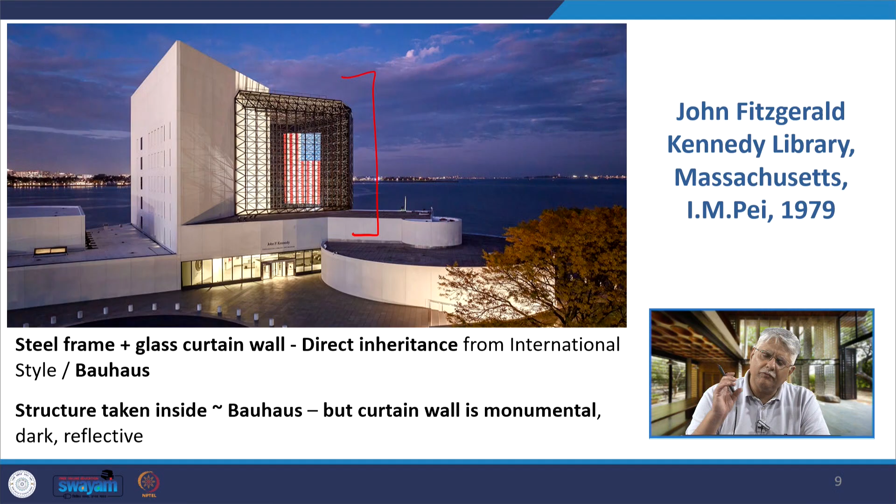So when we come to a late modern John Fitzgerald Kennedy Library by I.M. Pei in 1979, we find it also has a steel frame and a glass curtain wall. It is a direct inheritor of the international style Bauhaus. The structure has been taken inside just as done in Bauhaus, but the curtain wall here becomes monumental on a tremendously massive scale, and it is made of dark, reflective glass.

Again, there are pure geometries in this project, a glass cube pavilion and a stark contrast with the white concrete walls, and thus we say it has got a monumental abstraction. The building is not the orthogonal plain geometry that we found in Bauhaus, it is a much more abstract composition and a monumental composition. There is no outward ornamentation or historic reference, as in the modernist buildings in Bauhaus.

This library continues the modernist tradition of internalizing the structure, but it amplifies and monumentalizes the forms, turns them into statements rather than functional solutions. In Bauhaus, the internal structural system was a functional solution to the structural problem. Here it becomes more of a statement, more symbolic. And Charles Jencks also places it in late modernism, an era where modernist features were exaggerated.

Then we come to the Javits Center in New York by I.M. Pei in 1986. Please keep in mind that one of the intents that I have in showing you these projects is so that you can get a large vocabulary of buildings and architects who have done these projects, and also the wide geographical spread in which these buildings have been made.

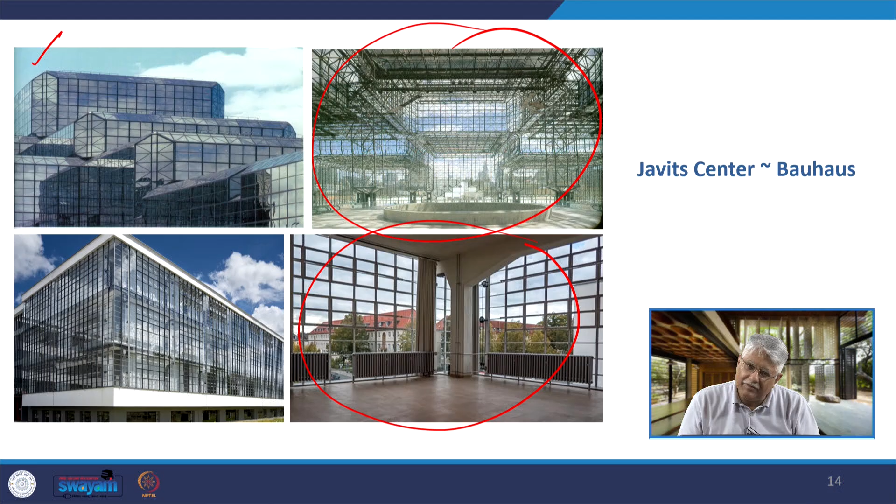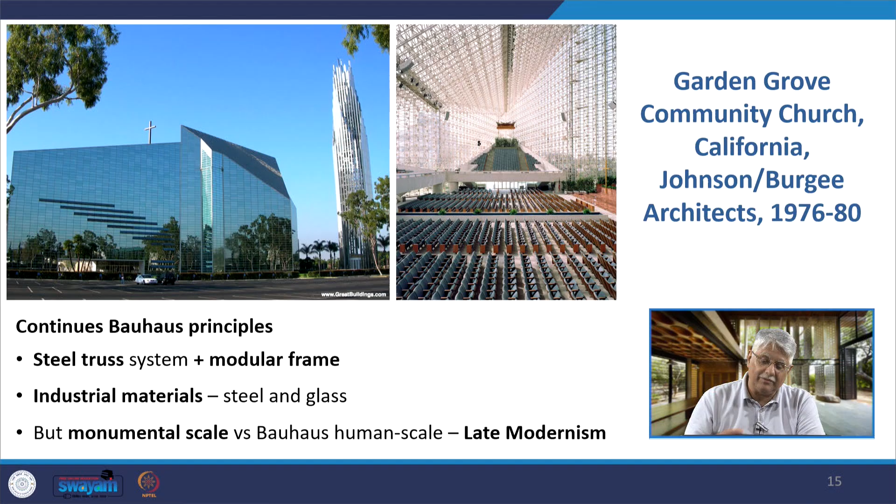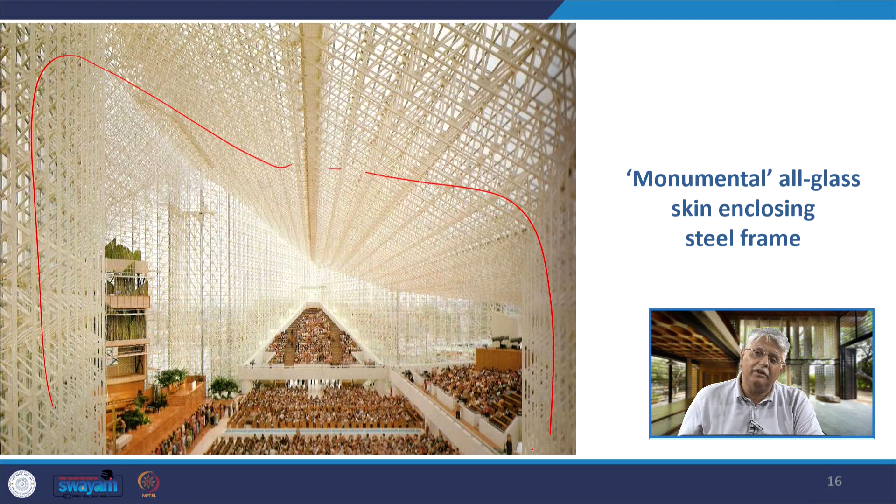Then we come to the Garden Grove Community Church in California by Philip Johnson and Burgee Architects, 1976 to 80. It continues the Bauhaus principle, again the steel truss system, modular frame, industrial materials, but a monumental scale versus the Bauhaus human scale. This is again an example of late modernism, and look at the scale. This is how amazing the scale of the interior is. This entire glass and steel structure mounted over the church is monumental, all glass skin enclosing the steel frame.

And then the second part, we come to the subset of the ones we have seen. Now the second part for today, there are at least three that we saw last time. We have seen the impact through Bauhaus. Now we come to a point called slick tech. Slick tech is an architectural expression that was mentioned by Charles Jencks, and it emphasizes technological refinement, smooth, well polished surfaces and a highly engineered aesthetic.

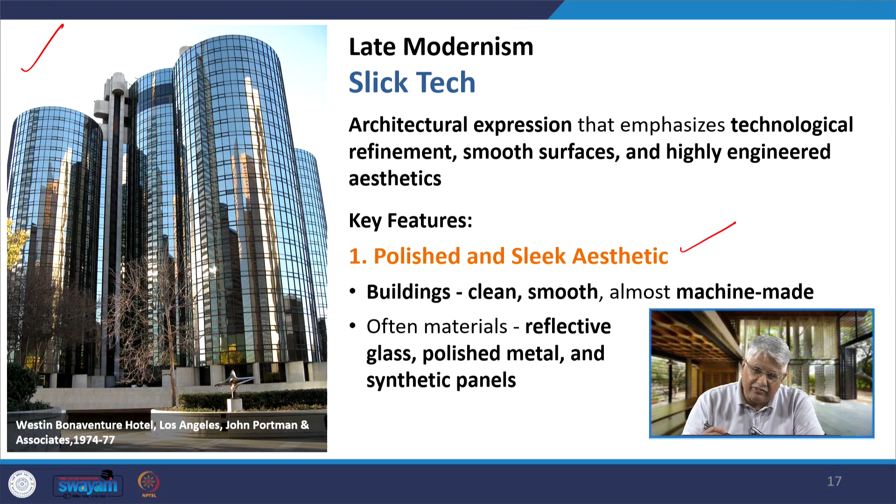So classic example, the Westin Bonaventure Hotel in Los Angeles by John Portman and Associates. Here you find this very sleek glass facade, highly polished smooth surface. So the key features are polished and sleek aesthetic. The buildings are clean, smooth, almost machine made, and often the materials used are reflective glass, polished metal and synthetic panels. It also has a corporate expression, generally used for corporate buildings, in this case big hotel buildings with some multi-purpose parts. Architecture serves large institutions, especially corporations and financial centers, and the projects convey a sense of power, order and control.

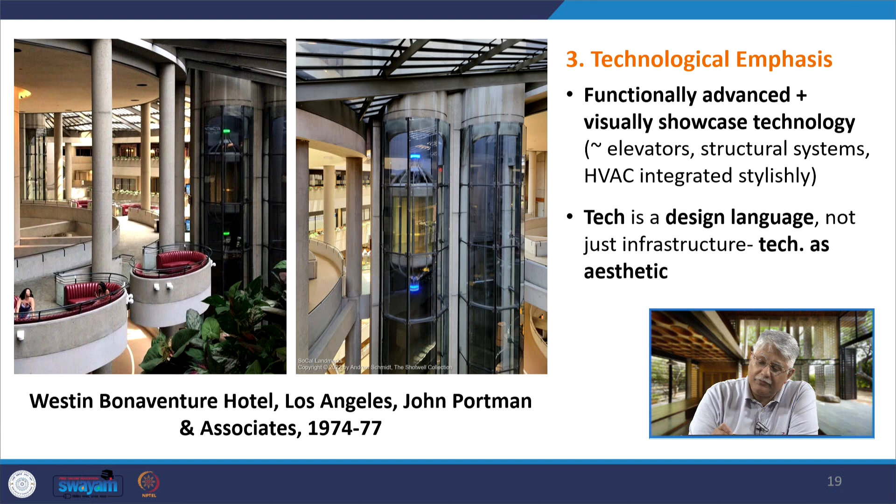Third aspect to it is technological emphasis. There is an emphasis on technology and trying to make technology a part of the design. Now this is a very important point, because later on in high tech architecture this point will literally explode, when all the equipment and machines in the building would be on display on the outside of the building. Here this technological emphasis is functionally advanced and it visually showcases technology. For example, you see these elevators running through the atrium of the hotel and they are clearly visible.

I am reminded of Antonio Sant'Elia's definition also, that elevators will not be hidden, they will run like serpents on the walls of the buildings, and it is happening. So these elevators, structural systems, the HVAC, they are all integrated stylishly into the building and they become a part of the design scheme. Tech is a design language, tech is used as an aesthetic of the building, and so the tech features are not hidden, but they are made a part of the overall design language of the building.

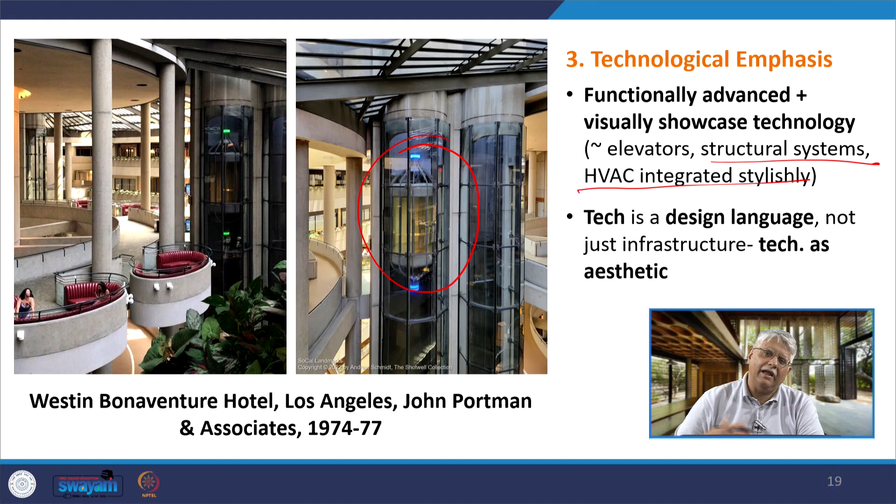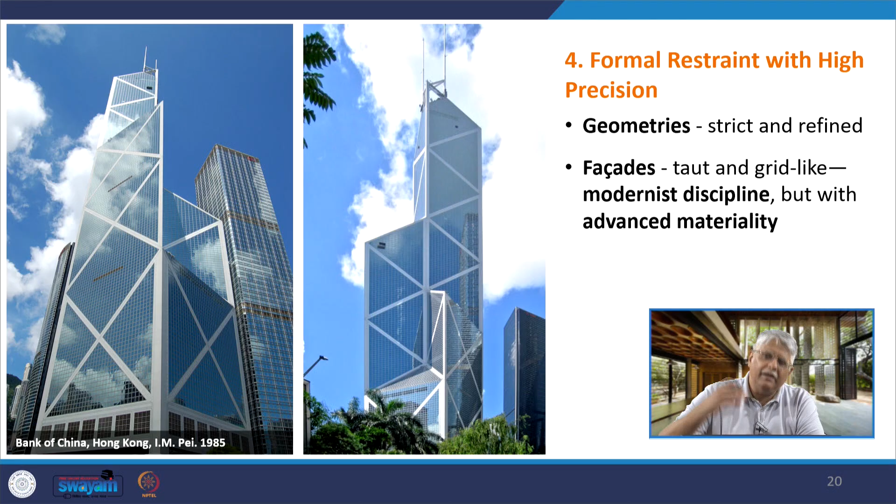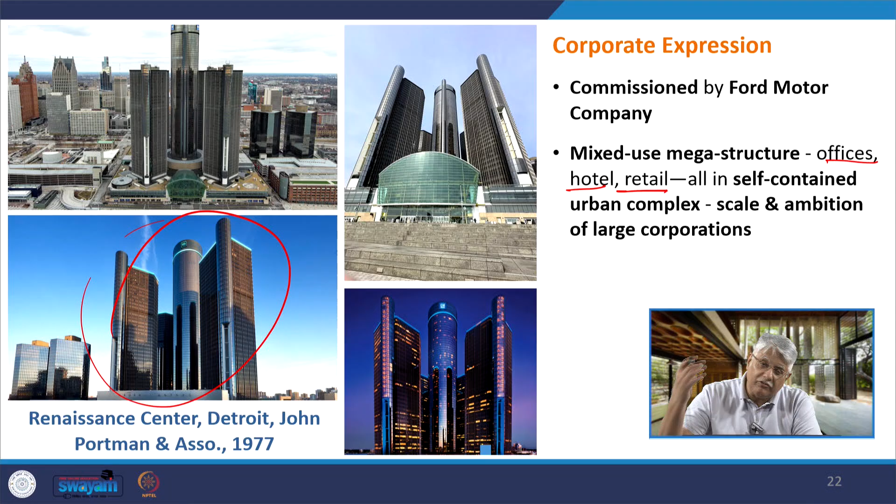It is a mixed use mega structure which has got offices, hotel and retail areas. All of it is self-contained in this urban complex and it has the scale and ambition of a large corporation. It is also a self-sufficient mega structure. That means the complex has got office towers, luxury hotel, retail spaces, restaurants, parking decks all within it.

And very interestingly, you see in the hotel that the cars are on display to represent the Detroit car industry and to show modern technology to make the building feel like a sleek high-tech showroom. So that intent is also being followed here.

Then we come to one of the buildings that is considered to be a textbook example of slick tech in late modernism, and that is the Willis, Faber and Dumas building by Norman Foster in 1970-75 in England. It has got technological elegance with precision, that is a curved glass curtain wall which is completely encasing or going around an irregular site around the building with seamless precision.

The glasses are put together without any transoms and mullions, and so we have modern materials and very high tech detailing. Today having such glass is very common for us to see, for example in airports, but in 1975 it was a unique thing to do to bring such sleekness in the glass facade. So the building reflects the surrounding in the daytime and the building reveals itself, the inside of it, in the night time.

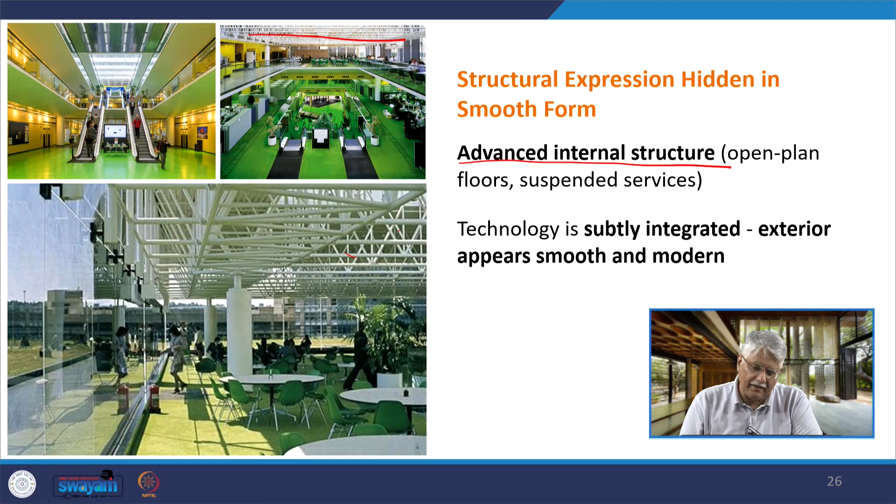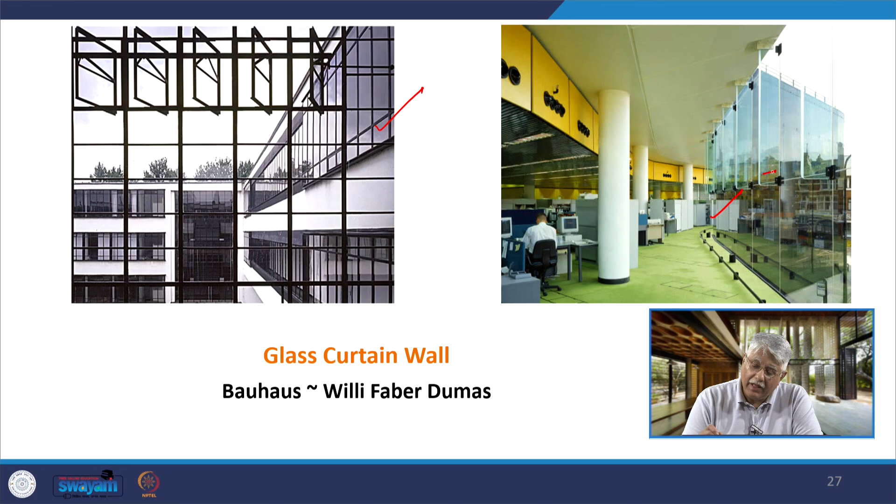If you look at the glass curtain wall and you want to compare with modernism, then the Bauhaus glass curtain wall was this one, having smaller glass panels with transoms and mullions, and this is that of the Willis, Faber and Dumas without any intervening members, continuous glass, only the fins are here, and the continuous glass stretches along the wall.

Then we come to the Hyatt Regency O'Hare Hotel in Chicago, again by John Portman Associates, and repeatedly we are seeing that John Portman are designing hotels for the Hyatt Regency chain. So again, as in the other hotels they have designed, this hotel also has a massive atrium.

The common design concepts and features of the hotels designed by them are evident in these Hyatt Regency hotels, because there is a standardized design language probably desired by the client, that is the Hyatt Regency chain, and for them John Portman Associates designed the atriums of these hotels, one more unique or stand out than the other.

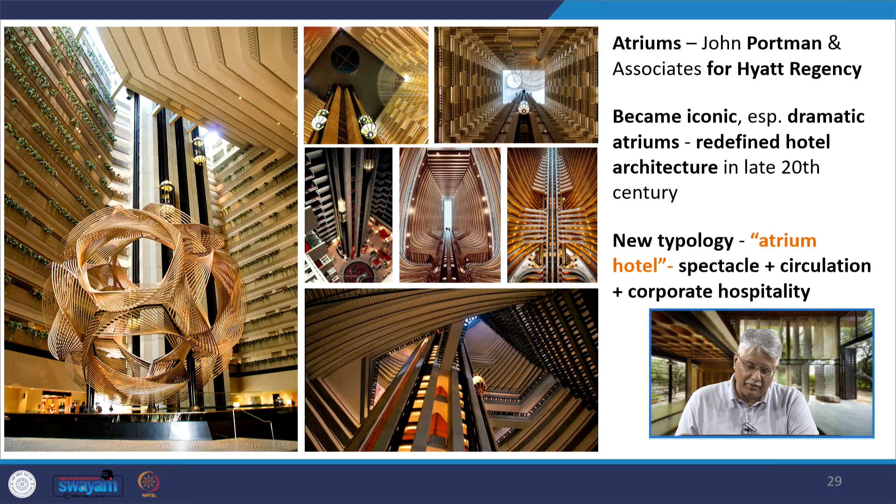And one interesting thing about the atrium is, as you can see, the scale is massive. So when you step into this kind of space, you lose the sense of the human scale. But what architects do when they design these atriums is that they provide these spaces at the floor level which are on a human scale, so that the whole monumental space gets divided into smaller spaces and thus becomes more suitable for human function or human use.

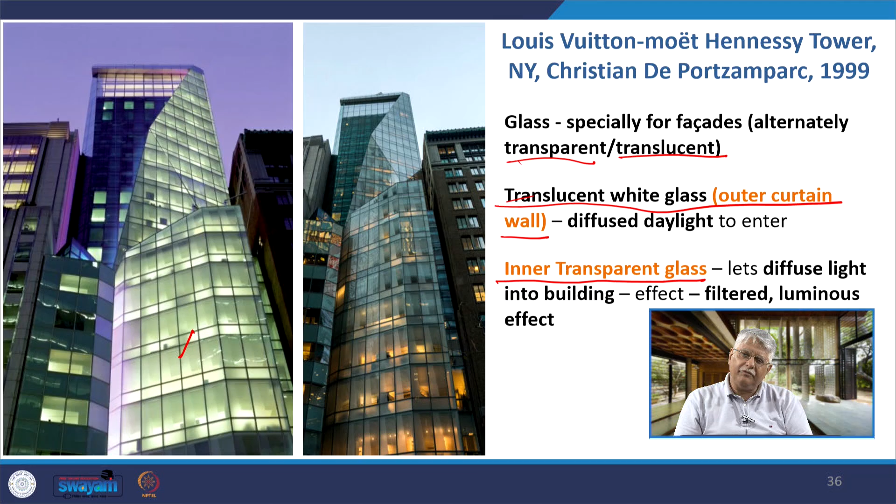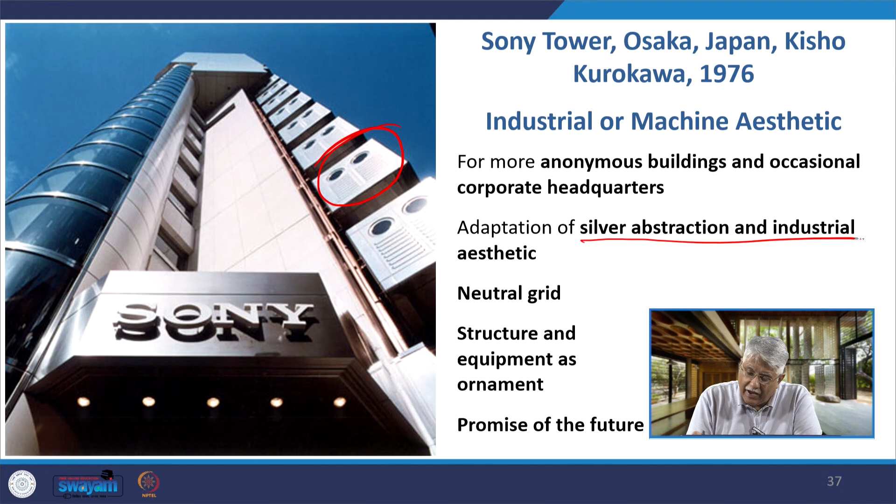Now industrial machine aesthetic was for more anonymous buildings and occasional corporate headquarters, adopting a silver abstraction or industrial aesthetic. I will tell you what it means. It means basically when you look at all the appliances around you today, you find that so many of them are silver in color. It could be your laptop, your phone, your tablet, your refrigerator, your washing machine. It is generally either silver, or it can have grey tone, or it can have white. So generally the appliances we use follow this kind of color palette.

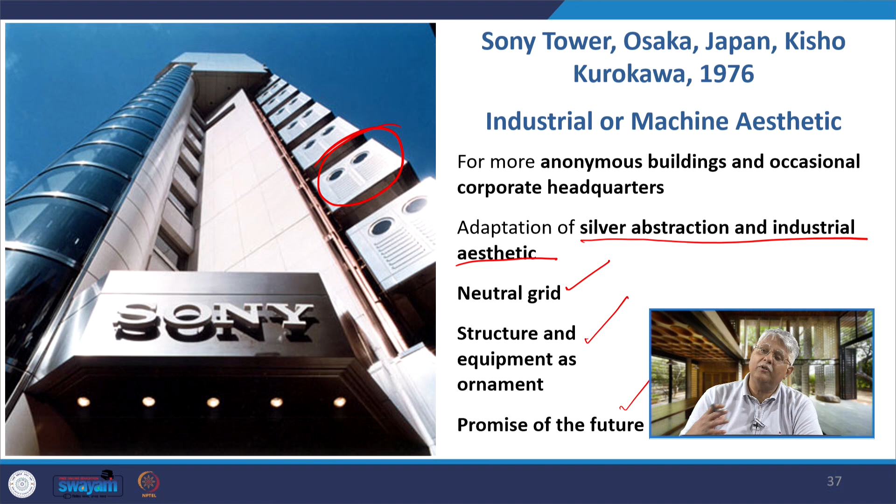Then again, this industrial aesthetic also has buildings which have a neutral grid. The structure and equipment become the ornament of the building, and the buildings reflect a promise of the future. When you look at them, you are reminded of what is to come in the future. So in these buildings there is use of metals in the facade, and most metals are either natural grey or silver finish. The word silver abstraction refers to the silver finish we find in the metals, and they play a large role in determining this industrial or machine style. The neutrality of silver or grey aesthetic is essential for teamwork design.

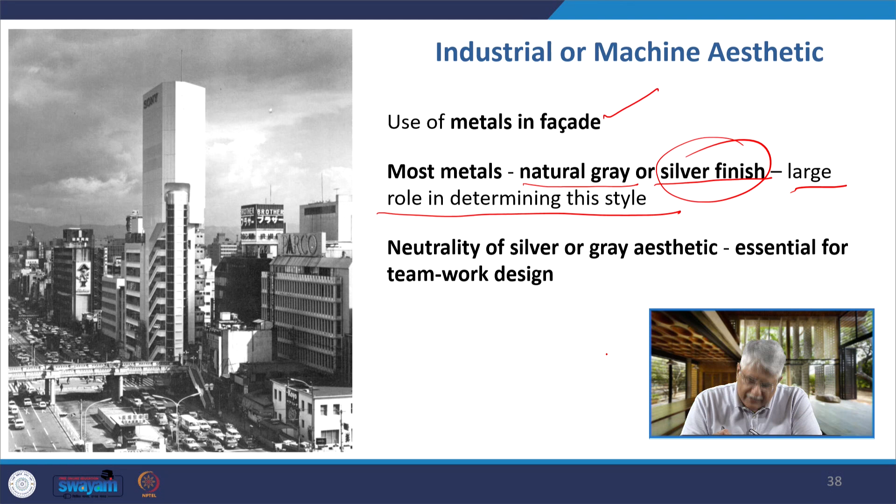I will explain that. Their concept about designing these buildings is that many designers are going to simultaneously work on smaller components of the building, and the final form is not aesthetically predetermined. There is only one thing, the neutrality of silver being a welcome background. This basically means all the small teams come to a common consensus that we will be working with a silver palette, or a neutral grey palette, or a steel finished palette. So they all work separately on different components of the building, the form not being predetermined, and when they assemble these parts together, the built form comes up. It seems unified because the palette each team has used is the same, so they all harmonize together.

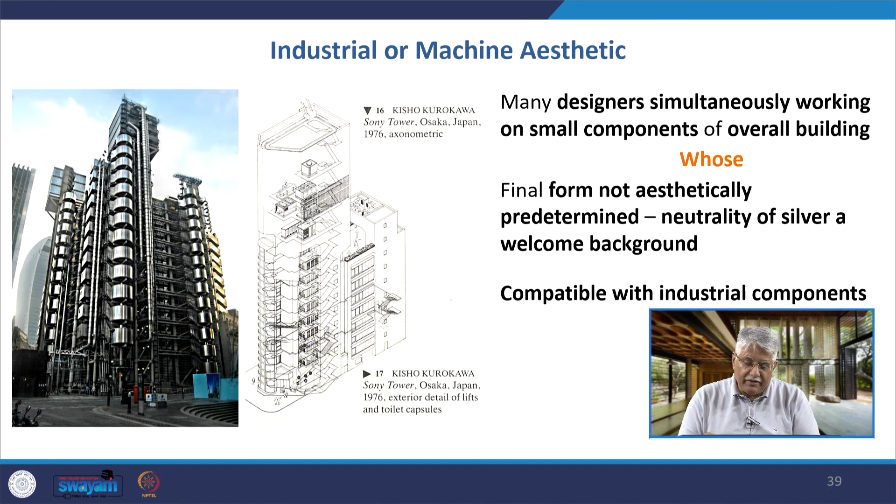Now when I spell it out like this, it seems very simple, but it is not so simple. There are many more complicated design steps required to put together a building like this. Also, these buildings are compatible with industrial components. By this time, industrial components or appliances that we use in our homes had started having tremendously good aesthetic quality.

When I refer to you a company's product, you are attracted to that product because of its tremendous aesthetic quality. When I say an Apple laptop, when I say a particular brand phone, when I say a particular brand television, the aesthetic quality of the industrial product plays a very important role.

Now when they said that they are designing buildings with the machine or industrial aesthetic, they are trying to make it compatible with office equipment in corporate buildings, or if it's houses, then the household appliances. But because we are focusing on corporate buildings, we will restrict ourselves to making it compatible to office equipment.

The second part is the building is considered to be a machine, a concept suitable for the industrial age. And here is where the second aspect we learn from Bauhaus comes in front of us. The first one was when I talked to you about the JFK library, that the Bauhaus curtain wall skin with the structure taken inside was the principle used in many of those buildings, albeit on a monumental scale.

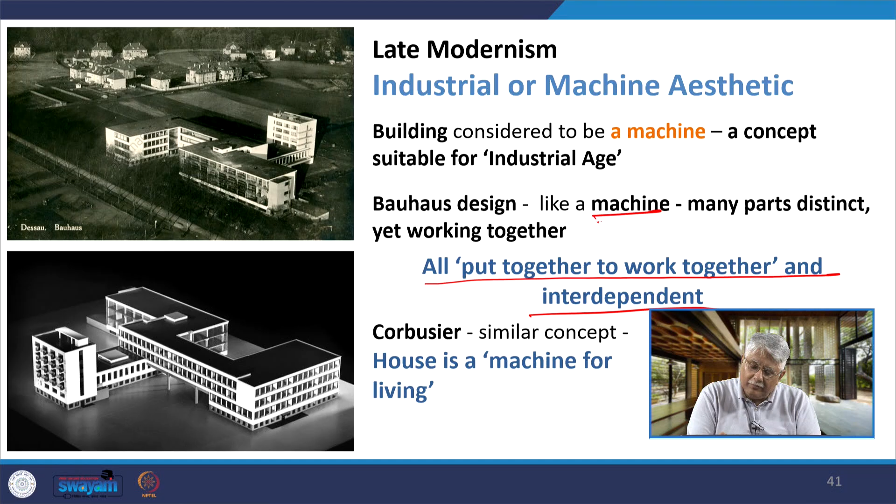So they started looking at the building again as a machine, or having a machine aesthetic became important for them. Something that had already been talked about by a modernist or an international style architect like Le Corbusier. Hence, even in the international style, the buildings had become industrial.

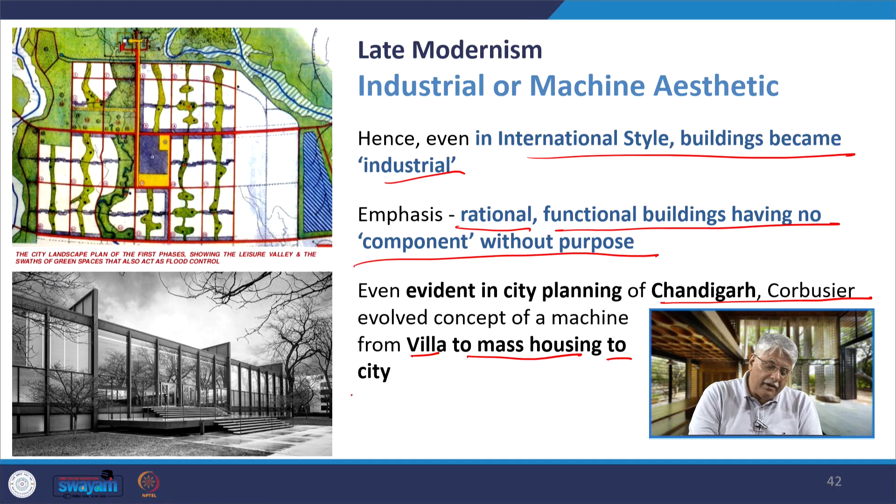The emphasis was on rational, functional buildings having no component without purpose, even evident in the city planning of Chandigarh by Corbusier, who evolved his concept of a machine from a villa to a mass housing project like Unité d'Habitation, ultimately to the design or planning of a city like Chandigarh.

Now, this industrial or machine aesthetic, as you see here in one of the most iconic buildings which define industrial machine aesthetic, is Centre Pompidou. Nothing is hidden, everything is expressed. All the ducting, all the AC pipelines, all the electrical lines, all of them are on the outside of the building and they are color coded with primary colors. We will talk about that in detail later.

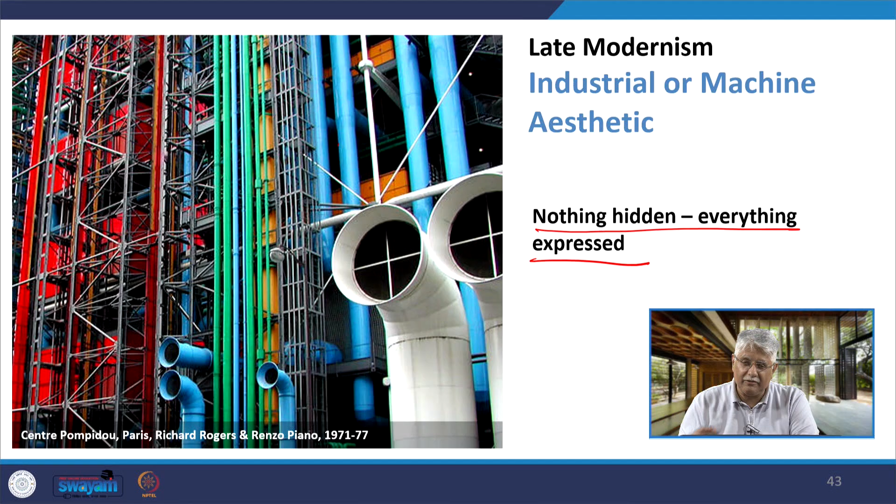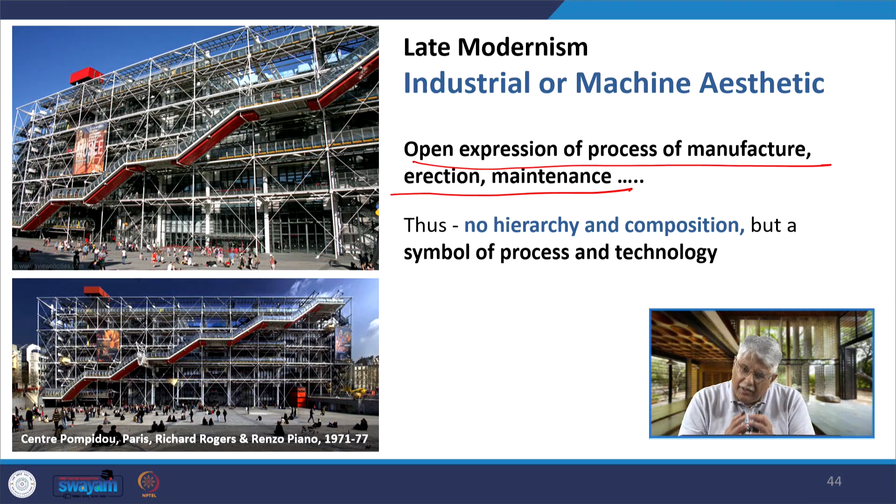It is an open expression of the process of manufacture, erection and maintenance. There is no hierarchy and composition, but it is a symbol of process and technology. That is how the building has been very clearly seen, how the building has been put together and how the building works.

High-tech architecture is not a subset of late modernism, though I am talking about it here because under late modernism we have machine aesthetic, and machine aesthetic is leading us towards high-tech architecture. But high-tech architecture is not a subset of late modernism, it is a parallel and partly overlapping movement that emerged from late modernism in the 1970s and continues even till today.

It evolved independently into a distinct architectural language in the 1980s and beyond, though it started from the industrial and machine aesthetic concept under late modernism. Richard Rogers said, a building should appear to be assembled from a kit of parts. So, the Lloyd's of London literally appears as if it has been assembled from a kit of parts.

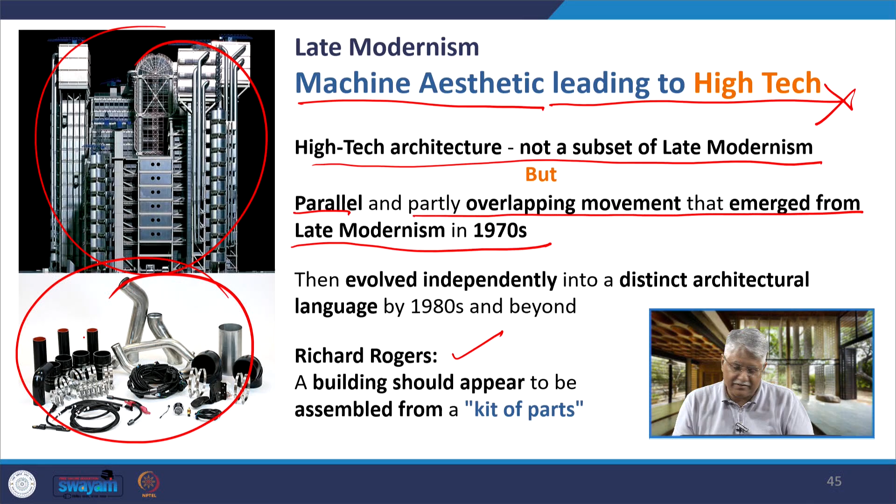Now, just to give you an idea of the chronological sequence of these movements, 1920s to 1950s we have modernism, which has got form follows function, with architects like Le Corbusier, Mies van der Rohe and buildings like Villa Savoye and Bauhaus. 1960s to 1980s we have late modernism.

It has got abstract geometry and advanced structure, industrial aesthetic, white aesthetic, it has got sculptural and geometric expression. All that is here in these buildings, and we have architects like Richard Meier, Kenzo Tange and I.M. Pei, and we have buildings like the Glass Pyramid.

1960s to 1990s we have postmodernism, which we will talk about later, which has historical reference. It has got ornamentation, with architects like Robert Venturi and Michael Graves, with buildings like the Portland Building and the AT&T Building. In the 1970s till today, like I said, till today, high-tech continues.

It is exposed services, structure as aesthetic, and metallic materials, with architects like Renzo Piano, Richard Rogers, and Norman Foster, and buildings like Lloyd's of London and the Centre Pompidou.

Now, in high tech, we have Lloyd's of London, but it goes without saying that this building also has machine aesthetic. When I say high tech, I am not neglecting the fact that it displays a sense of a machine or industrial aesthetic. Better still, the word is factory aesthetic. This has got services and circulation which are obvious and accessible.

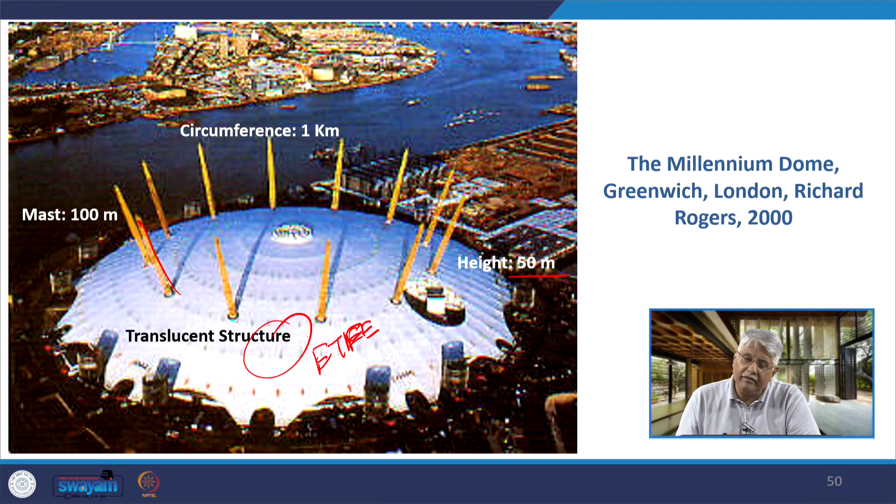So the Millennium Dome has got a translucent structure. It is made of ETFE, or you can simply call it Teflon. The height of the dome is 50 meters, its circumference is 1 kilometer, and the masts themselves are 100 meters high. It has got an industrial aesthetic, but it falls primarily in the category of high-tech architecture.

Now, late modernism carried on to the advanced phase of the industrial age, where architects looked into varying building typologies for their answers. Many were quite unorthodox vis-a-vis the building, but they were fundamentally correct. They were looking at building typologies which were not the buildings they wanted to build, but they found that these typologies gave them the right answers. For example, warehouses and factories gave them the answer for the design of community halls and exhibition halls, like the Sainsbury Centre for Visual Arts, which is a factory aesthetic.

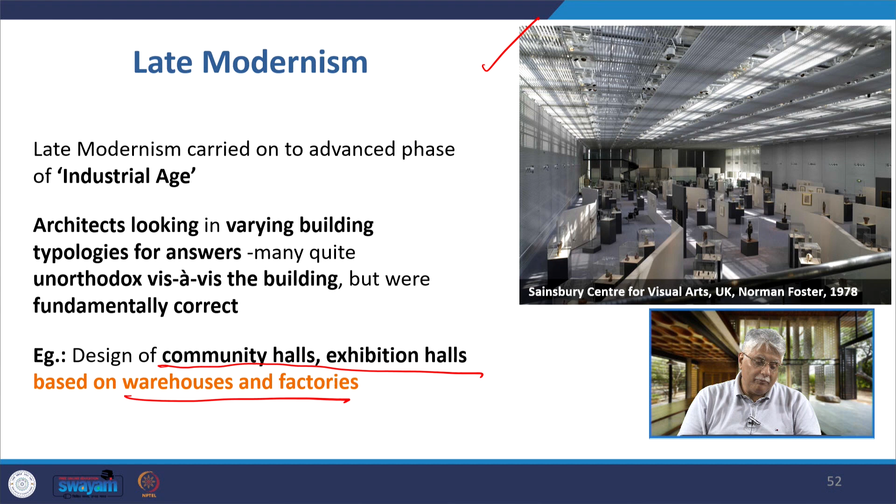One thing you might have noticed: when modernism and international style were prevalent, there was a lot of uniformity in the buildings. Buildings of a type all looked very much alike. The differences were few, the variety was less. But when we step into late modernism and parallelly postmodernism, there was a lot more variety in how the buildings looked visually. And this variety has now become colossal in contemporary times. We will talk about that later.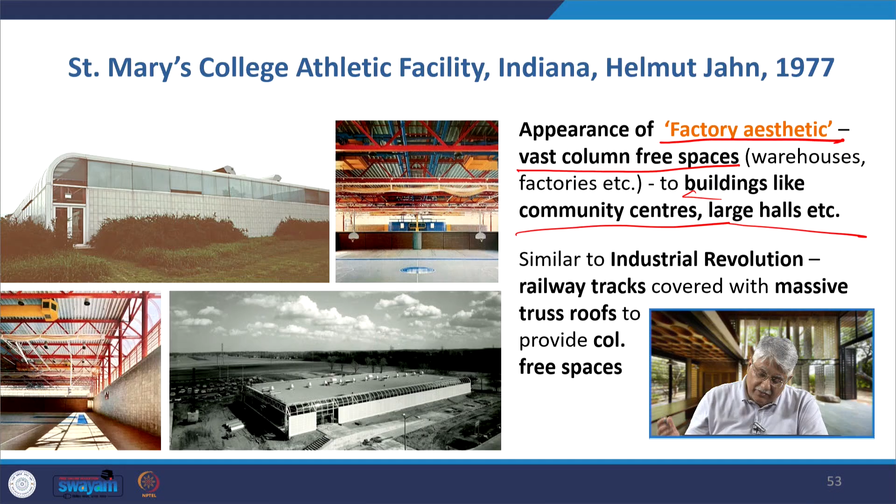Again, with the factory aesthetic, late modern spaces turned monumental with large column free spaces like the Bartle Exhibition Hall in Kansas City by Helmut Jahn: 200,000 square feet of column free space using repetitious triangular trusses.

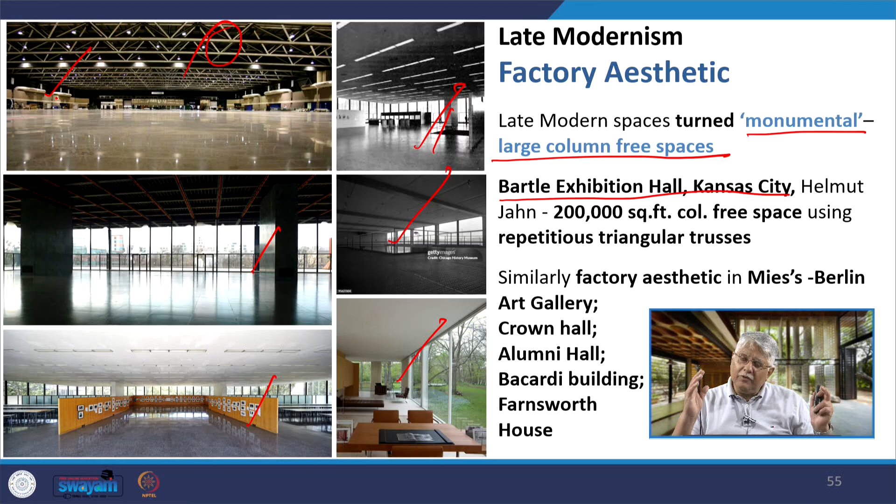Now a similar factory aesthetic did exist in the universal spaces designed by Mies van der Rohe. When you look at the Berlin Art Gallery, the Crown Hall, the Alumni Hall, the Bacardi building, and the Farnsworth House, these are all universal spaces, and they were also very close to factory aesthetic or industrial aesthetic.

In the New National Gallery in Berlin, the works of Mies show that they are foundational for large column free spaces, resulting in global architectural trends. And I pointed out to you that he was a pioneer of the large span space and the long tall span space. So in these large column free spaces, Mies was a pioneer, and he set these global trends.

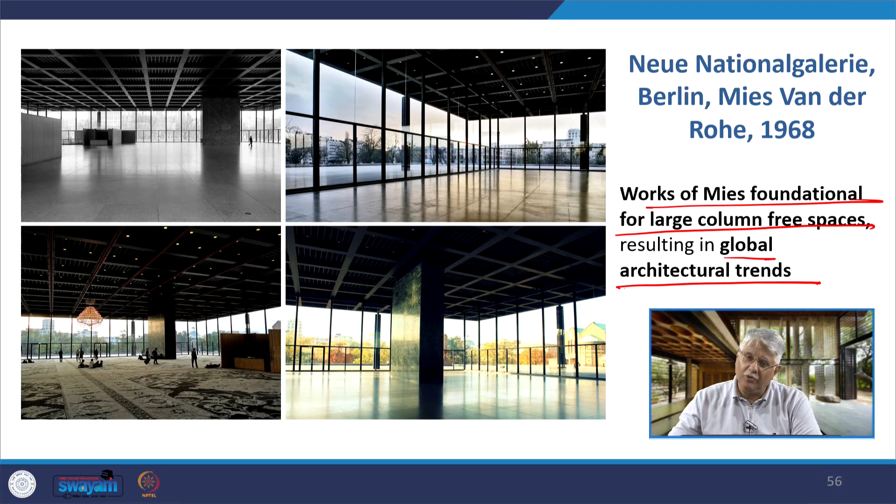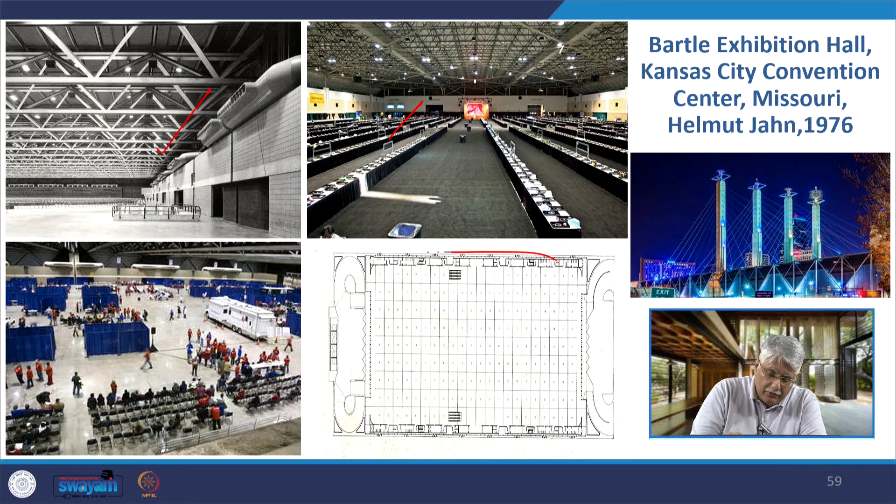And in the Bartle Exhibition Hall, which is a part of the Kansas City Convention Center, you find here the example of this huge column free space. Now when we talk of evolution towards late modernism, we need to go back to some older buildings to understand their impact happening decades later.

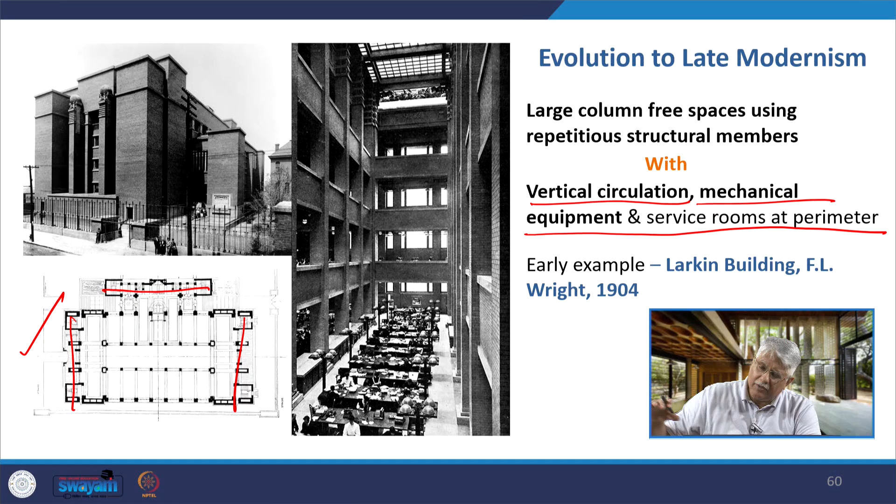Large column free spaces using repetitious structural members with vertical circulation, mechanical equipment and services at the perimeter of the building. We find that early example in the Larkin building, where all the services are kept at the perimeter of the building. The staircases, the mechanical equipment, the ventilation system, all on the periphery. And such organization of space is an archetype or a prototype for late modernism.

So we find that here, for example, in this large space, I believe it is the Bartle Exhibition Hall. This has got this huge space with all the services on the periphery. The perimeter structural supports, services and columns leave a column free isotropic center. Isotropic means having the same physical properties in all directions. The entire space within is column free and it is identical in all directions. It is the Miesian universal space at a monumental scale.

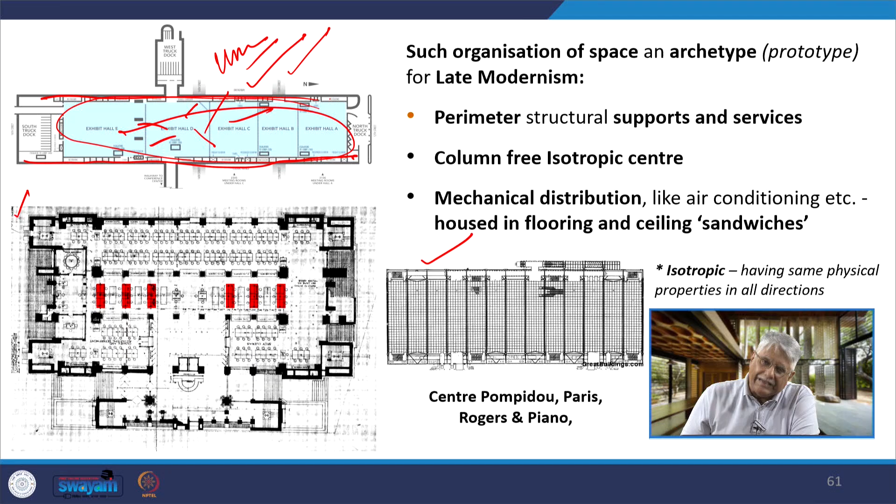The mechanical distribution like air conditioning is housed in flooring or ceiling sandwiches. So we find this principle of services and equipment provided on the periphery in the Larkin building. We find that idea happening in the Bartle Exhibition Hall or even in the Centre Pompidou in Paris, which we will see in more detail. Column free spaces, further, are an exaggeration of the Miesian model.

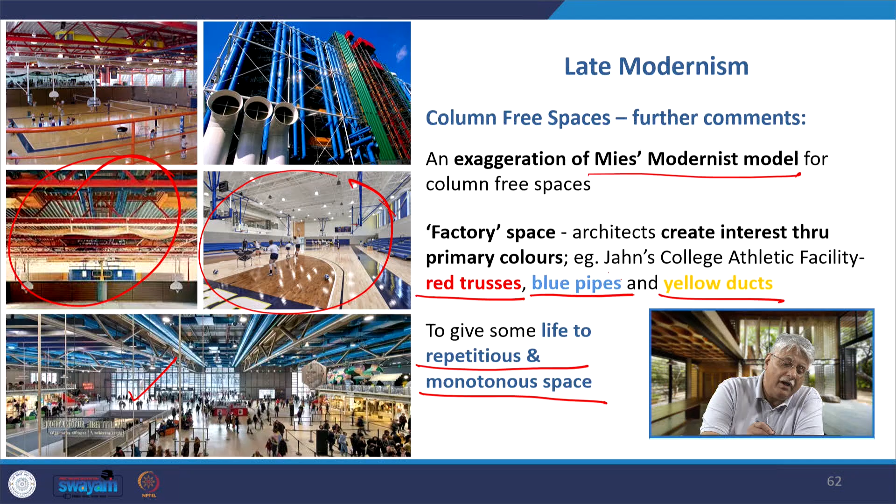The factory space: architects create interest in these factory spaces, which are basically repetitious and monotonous, by providing primary colors within the building. So the Jahn's college athletic facility that you see here has red trusses, blue pipes and yellow ducts. Or even in this athletic facility you see primary blue has been used, or there is a riot of primary colors used in the interior of Pompidou and more so in the exterior of the Pompidou Center.

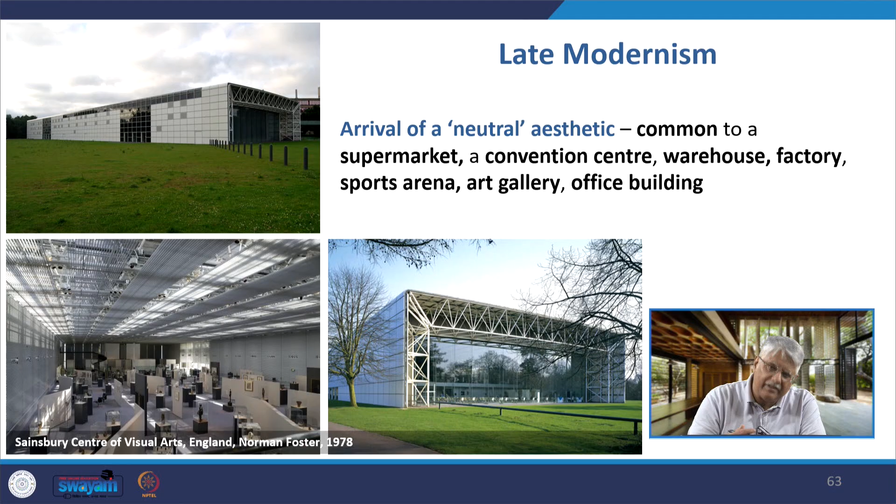Then came the arrival of the neutral aesthetic also, common to supermarkets, convention centers, warehouses, factories, sports arenas, art galleries and office buildings. You find this neutral, very dull grey or silver aesthetic in the Sainsbury Centre for Visual Arts. Here it is, where color is not used.

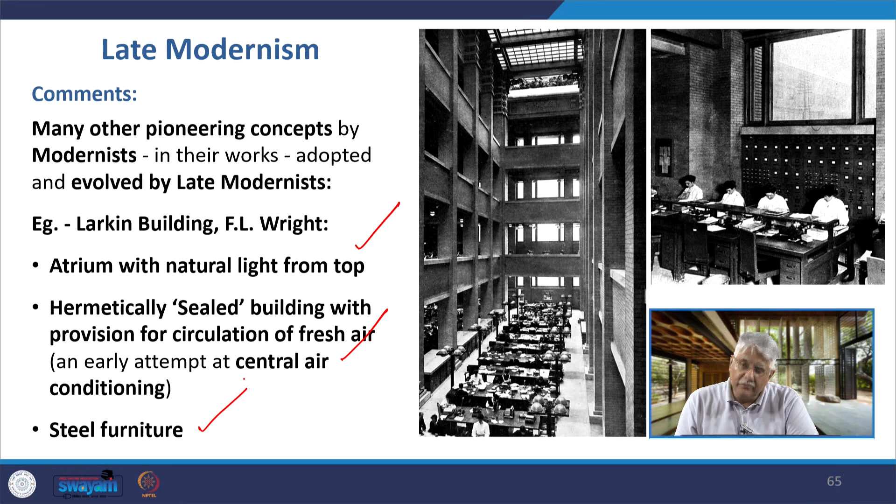Now again, going back to the Larkin building, many other pioneering concepts came from there. For example, an atrium with natural light coming from the top, a hermetically sealed building with provision for circulating fresh air, thus laying the ground for central air conditioning in later years, and also steel furniture used in office buildings.

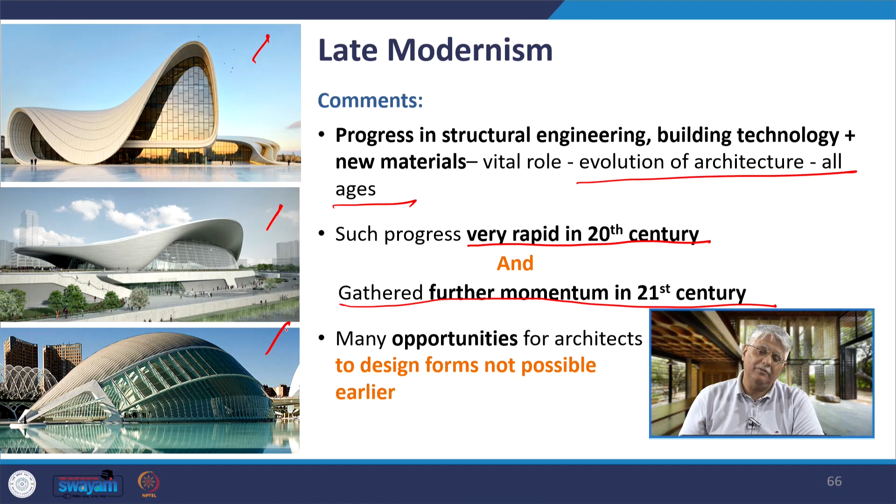Progress in structural engineering, in building technology and in new materials plays a vital role in the evolution of architecture in all ages. Such progress happened very rapidly in the 20th century and it has gathered further momentum in the 21st century. Thus, there are many opportunities for architects to design forms like this or this or this that were not possible before. Modern buildings are strengthened with the spirit of the industrial age. Similarly, the buildings of today are being molded in the information age.

They are intelligent buildings. Other important concepts concerning today's times are the focus on environment, thus green buildings, on energy and even economics. Architecture of this age is also defined by new materials, as has happened in previous periods and civilizations. Thus, we have covered late modernism and its various aspects. In the next presentation, we will start with postmodernism.